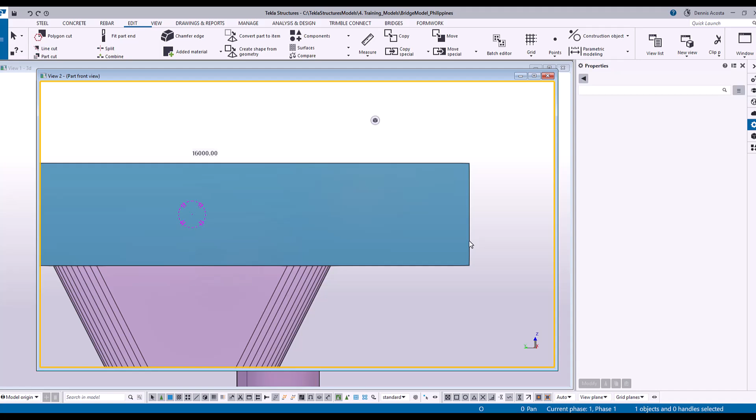Okay, let's see if I can do this using the control key. This will be a different way of cutting without using the construction point.

Polygon cut, select the part to be cut. Okay, and from here this is my reference point. Okay, 1, 500.

Okay, 500, and to get 500 from here I need to pick this again but pressing the control key, and then go for 500 again. And here, to get 4,500, I will press the control key and then 4,500. And then this one, and then middle button of your mouse.

So if you notice, I created the cut without using the construction point. Okay, but of course at first it's a bit hard because you need to know how to use the control key on the keyboard. So if you don't know how to use the control key, then we can go back to the original way.

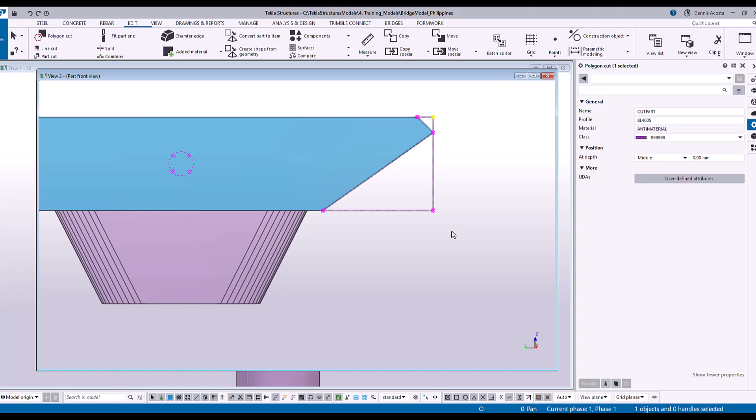So again, points. This one, negative 500, apply. So 500, 500, and then 4,500. Maybe at this point, it's easier to do this because you have points that need to be picked.

Okay, let's go back to the polygon cut. So pick the part to be cut, and then 1, 2, 3, 4.

Oops, I made a wrong click. Press the backspace — when you make a wrong click, you don't need to repeat everything. Just backspace to remove the latest pick point. And then, middle button of your mouse.

There you go. Okay, so again, just copy mirror. Copy, mirror. I think, yes.

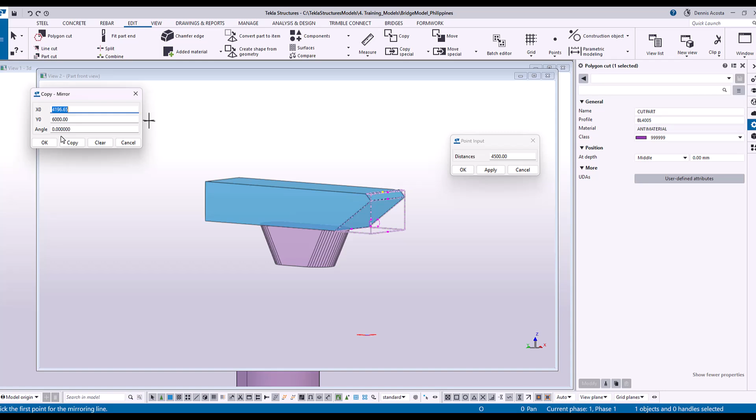Next I'm going to use the side view. This side view here, Control 4. So in the side view, again 500, negative 500, apply. So I'll place points here again.

Using the cut line cut: select, then 1, 2, 3, 4. This means select the part to be cut first, then 1, 2 for the direction, then select which side to remove. That's the line cut. So now we have this.

So, maybe in this shape, instead of a straight cut, we can make it a curve on the side. If we want to curve this cut on the side, we can do that.

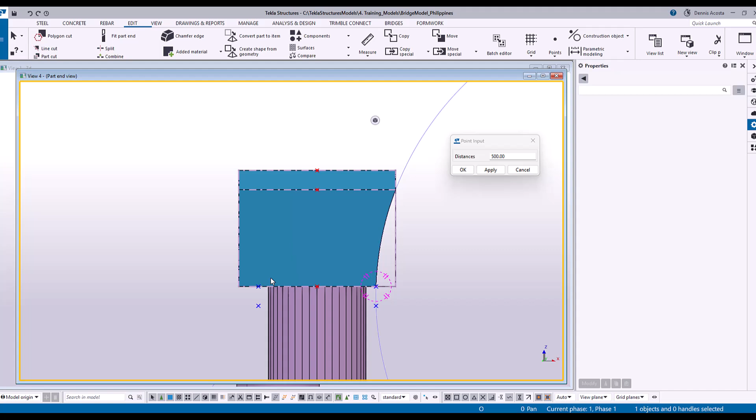Let's just copy this. Copy, mirror. So let's go to the top view. Copy mirror. So let's remove this reference. And then, we now have the cut.

Okay, to repeat, I'm going to repeat this one. It's a straight one. So what I did here was copy these points, moved them 500 so I have 3 points to pick. And then all I have to do is go to this construction object, circle, but I need to choose 3 points by 3 points. So select this part, 1, and then 2, and then the one 500 below.

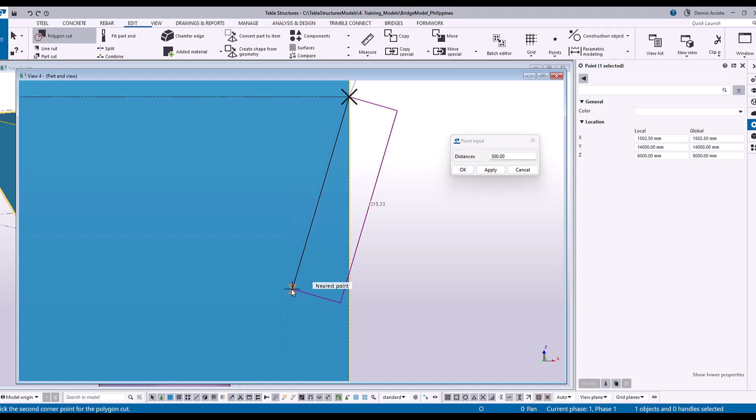So from that construction object, what I will do is use the polygon cut, right? And then select the part, then 1, 2, anywhere on that circle, as long as you pick the part of that circle, 3, 4, and then middle button of your mouse. Then remember, it will have a handle in the middle, select it, and then change it to arc point, and then enter.

And there you go. So now you have the circle, just select this, and then delete. Okay, so just close it. Now, to clean up this view, you can remove the construction points there.

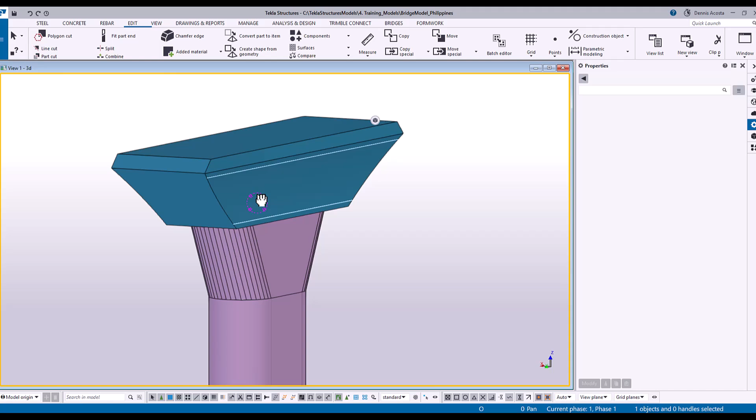So now it has kind of architectural features because, you know, architectural designs usually have a bit of curve. Again, if you're having a hard time adding that curve, you can just simply cut it straight. No worries, but at least you know we can do it as a curve too.

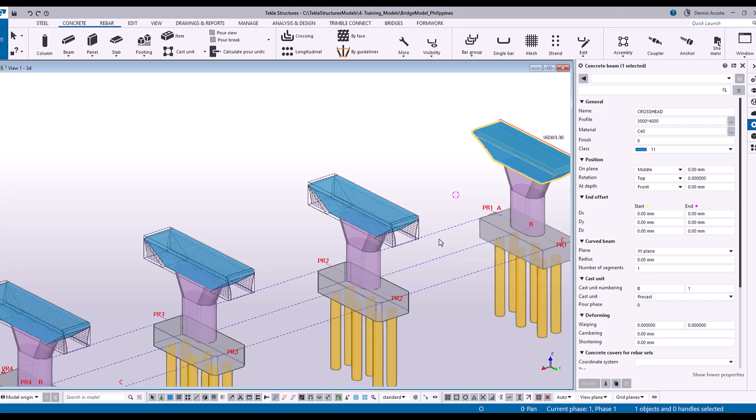Okay, so ang gagawin lang natin dito, simply copy this one, copy, linear, from this point to this point. So 1, 2, 3, three copies. Ayun, meron na tayo. Then i-redraw nyo lang yung view natin kanina, kasi pag once nag-copy dyan, lumalabas uli yung cuts. So redraw para mawala yung cuts. So at the moment, straight lang tayo, linear lang tayo. Tomorrow, kapag meron na tayong alignment, then we can follow the alignment. Okay, so yes, we're done with this.

Crosshead. Okay, halimbawa meron tayong may cuts tayo dito, di ba? So usually kasi ganyan eh, minomodel muna natin, then suddenly, ay meron palang cut. So paano ko uulitin ngayon doon sa tatlong beam na pare-pareho sila? Pero na-i-model ko na. Ayaw mo namang i-delete ko ulit, then copy. Pwede naman yon, i-delete ko lahat yon and then copy.

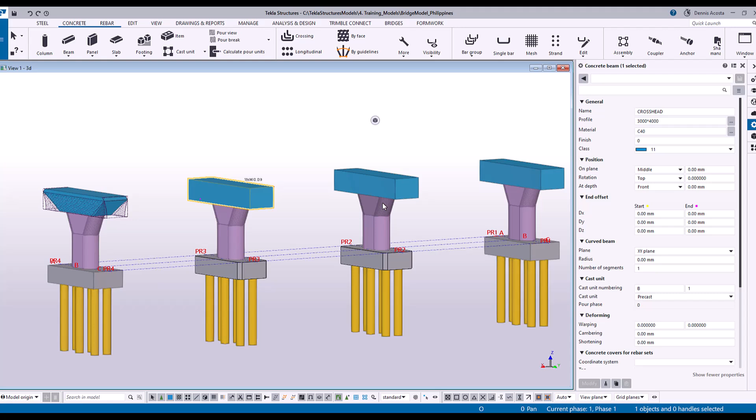Pero kung since nakapag-create ka na ng identical beam, at para i-copy mo yung detail na ginawa mo from one crosshead to another crosshead, all you have to do is this. Nakita nyo itong select assemblies, kindly click select assemblies. Okay, naselect na natin yung assemblies. Then iselect natin itong yung first assembly, yung first object na ginawa natin ng cuts. Then right-click, makikita nyo copy all content to another object. Sa copy special, all content to another object. And then all you have to do is pick the destination object.

So tingnan nyo, 1, 2, 3. So yung option na yan, not only work for cuts, but kung meron kang reinforcement na ginawa dito sa isa, and then you have the identical, you can copy to another object. Or kung meron kang ginawang cut dito, pwedeng copy to, or kung meron kang inilagay na steel embedded part doon sa object na yon, pwedeng copy to another object or copy all content to another object.

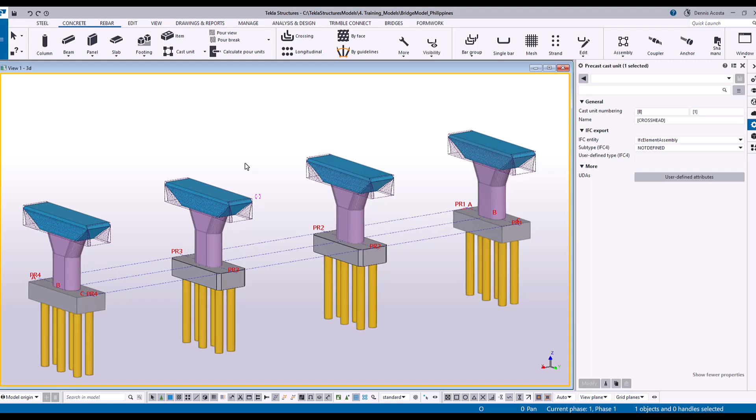And then i-turn off uli natin yung ating cuts and fittings, modify, and then balik uli tayo doon sa select component, ha? Kanina kasi sinelect assemblies natin eh, select components ulit tayo, select components. Sir, for example po, kapag kunyari sa bearing, masasama din po ba yung pag-content? Yes. Okay, let's do the bearing.

Yung bearing, okay, from here, doon sa right-hand side, makikita nyo, meron tayong application and component, di ba? So kindly select this three bar and then import custom component. Kindly import custom component, sige click nyo yan. Okay, ulit, on the right-hand side, mapapansin nyo, meron tayo ditong tatlong icon, apat na box dito sa baba, which is application, component and components. So i-click nyo yan, application and components, and then kapag lumabas natin application and component, lalabas na yung tatlong bars. So from that three bars, kindly select import custom component.

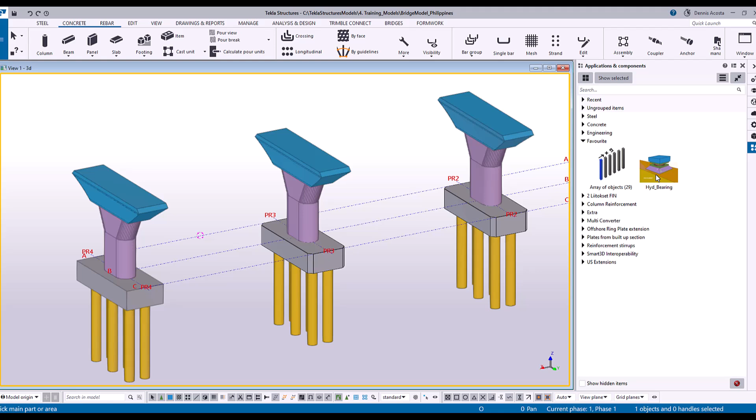Okay, so look, paano natin gagamitin ngayon yung bearing na yan? Okay, so once na-i-close mo yan, mapapansin mo, meron na ngayon ditong favorite, makikita mo na yung HYD bearing. So i-double click nyo yan, kindly double click the bearing. Makikita nyo, meron siyang, yan. Ito na yung, hindi siya fully detailed, pero as a presentation of bearing, it could be like this. And then the thing here is, as you can see here, meron akong ginawang option dito na tawag dito, control depends on the slope. Minsan kasi, di ba, merong yung slope is pa ganito, minsan pantay. So meron tayong ginawang option dito. So later on, pwede mong i-move siya, and then at the same time, yung mga dimension nito, pwede mong laruin kung anong size siya. Okay, so paano ngayon gagamitin ito? Okay, ang paggamit nito is this.

Okay, halimbawa, from this point to this point, hatiin natin siya into 5 spacing. Just for an example ha, pero pwede nyo namang mag-decide kung saan nyo ilalagay yung bearing. Gusto ko lang ipakita sa inyo paano ginagamit, paano i-add yung bearing.

One way, of course, you can model it one by one. But if you model that one by one, lot of procedure. Pero kaya meron tayong component to make our work easier.

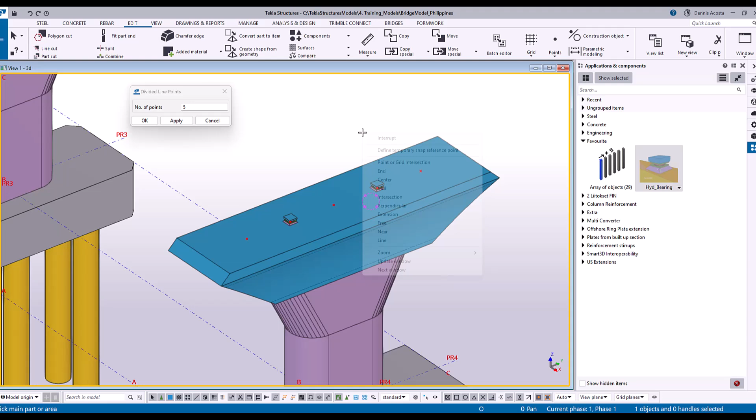Kung nalilitan ka sa bearing, then of course, you can always change this one. Halimbawa, ang bearing mo is 600 by 800 dito. Modify. So select mo lang to and then modify. So it could be a different size.

Okay, gets? Yes. Ngayon, going back to your question. Hindi ko naman nalimutan yung question mo. Okay, so look. Naka-select component tayo, di ba? Select components, kasi itong bearing is a component.

Ngayon, kapag isinelect ko tong component na to, right-click, copy special to another object. Kanina, nung nag-select tayo ng assembly, all content to another object. Ibig sabihin, kung ano yung content ng assembly na yon, ika-copy niya. Ngayon, this time around, nag-select tayo ng component, makikita mo rito to another object. Ibig sabihin, kung ano yung selected item mo, yun lang yung ika-copy mo.

Okay, so two different things ha. Yung isa kanina, all content, kung ano yung part ng assembly. Ngayon, this time, kung ano lang yung sinelect mo. Halimbawa, sinelect ko itong dalawang assembly na to, or component na to, to another object. Okay, i-pick mo yung source, and then yung destination. Clear?

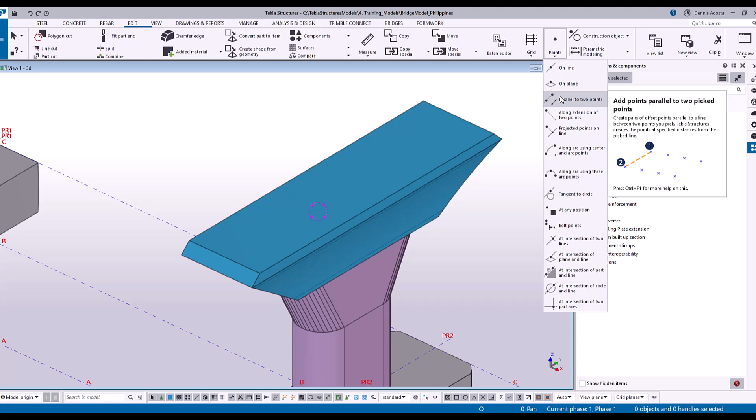Ulitin ko. Gagawa ako rito ng online, from this point to this point. And then what I will do is, I'm going to move this one 1,000 from here. And then copy these 2 points. Copy. And this one is 2,000 from here. Bakit? Kasi copy, copy, 2,000 from here. Why? So that here, I can just simply pick 1, 2.

Hindi siya nag-move. Okay, anyway, hindi pala siya nag-move kasi nasa center siya. So hindi ko siya nalagyan ng... anyway, should be okay. Ang gagawin lang natin dito is i-explode lang natin siya. Explode. And then once na-explode mo na siya, pwede mo na siyang i-move.

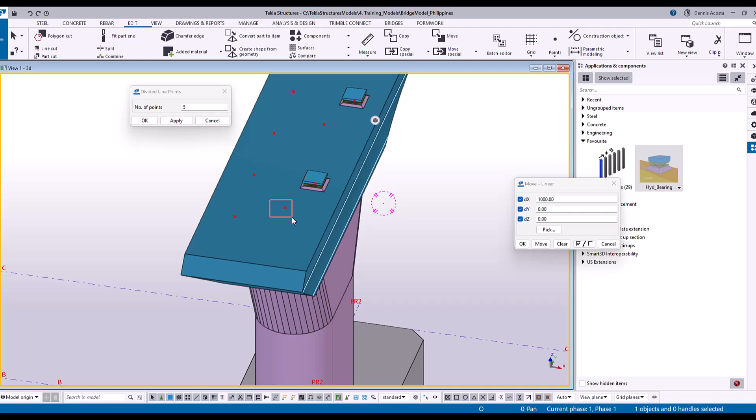Move special linear. So from this point to this point, 1,000. Parang ganyan, akala ko nakabind po siya sa center. Nakabind siya sa center, inilagay ko kasi siya, nabind ko siya sa center. Hindi sa dito sa side.

So ang gagawin lang natin diyan is i-move ko siya diyan, okay, center. And then dito, maglalagay ako ngayon dito ng panibago, which is again, points online. And then move 1 meter, copy 2 meters.

So ito yung ating... so bakit naglagay ako dito sa side? Kasi ang bala ko dyan, maglalagay ako dyan ng bridge girder. Yung isa bridge deck, yung isa bridge girder. So combination. Okay, so ngayon paano natin ika-copy yan? So copy na lang siya. Copy, hindi copy special ha. Bakit copy? Kasi kapag copy, ibig sabihin, pwede mo siyang parang copy multiple. See?

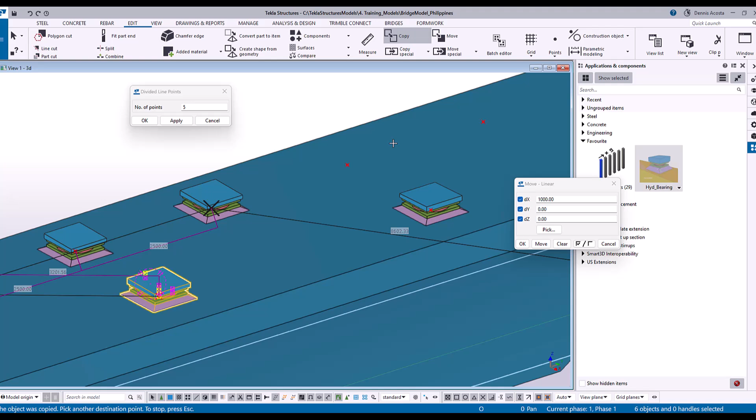Alright, and then here as well. 1, 2, 3, 4, 5. There you go. Or ito, copy na rin natin lahat yan from this point to this point. Okay, alright, so don't forget to save.

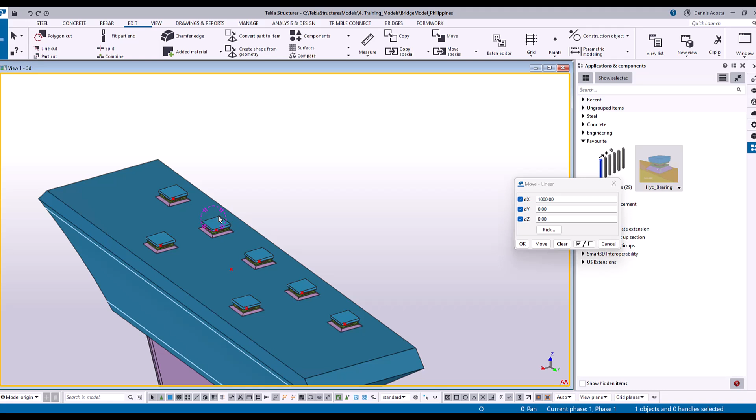Okay, nakita nyo yung itong mga points na to na ginawa natin. Itong mga points na to. Ang gagawin ko dyan, isi-select ko siya like this. Okay, select like this one. Shift key para ma-select natin. Kaya ako naman siya isinelect ng ganito is to move.

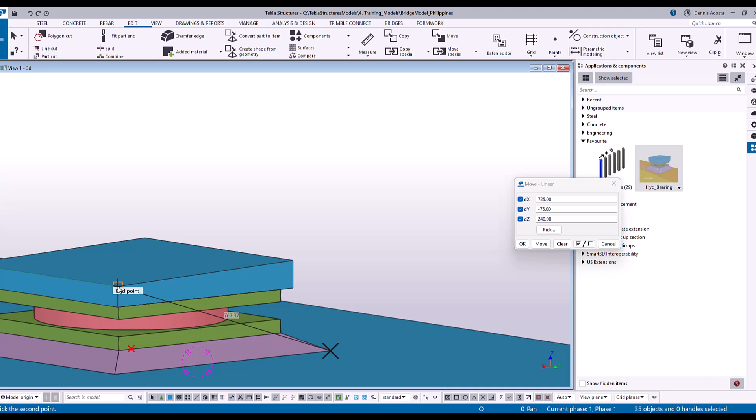Okay, to move. Right click and then move linear. So from this point to this point, from move linear, from this point to this point, going up is 240. Gawin lang natin tong 0, and then move, para nandoon siya sa top.

Wala, pag ni-redraw nyo, mawawala siya, di ba? Palitan nyo lang yung visibility up.

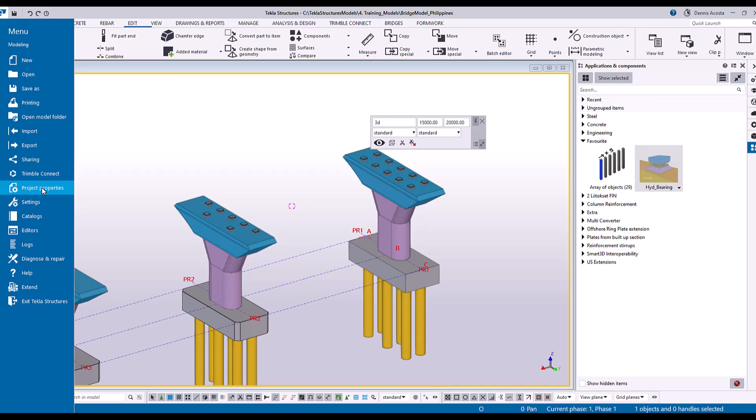Pasuyo naman, kindly go to your catalog and then select the profile catalog. Yung ginawa natin kanina, di ba? Yung profile catalog. Mag-import tayo ng profile for our bridge girder there. Okay? So, I want you to go back to the profile catalog.

Okay, so ngayon, the reason na pina-import ko sa inyo yung profile kasi meron akong ginawa dyan na box girder. Box girder, okay? So from here, punta ulit tayo sa kanina, di ba, nag-import tayo ng bearing? So, same thing.

I want you to import custom component, but this time, i-click nyo yung box girder. Bridge girder yata yun. Bridge girder. Saglit, ha?

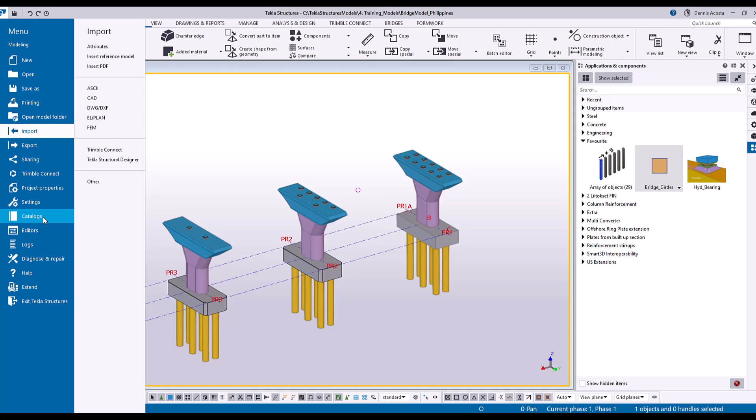So, import. Tawag dito, it's something like from Dennis. Hindi ito. UEL siya. Bridge girder. No. Sorry, parang may mali. Dapat yata is LIS pala yung inimport nyo. LIS merge.

Okay. Ulit tayo doon sa profile catalog. Medyo na-confuse ako dito kasi dalawa siya. Yung bridge girder na UEL, that's a custom component. Then doon sa catalog, ang kailangan i-import is LIS. Import LIS. Okay, and then save the model folder. Ang lalabas sa inyo, kapag tama yung ginawa natin, ito yung bridge girder natin. Here.

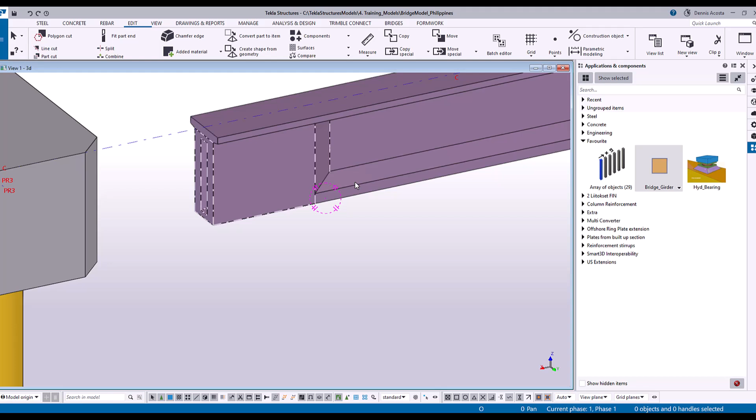So this one is a combination of profile. At the same time, naglagay ako ng block sa two ends. Usually ganito yung mga bridge girder, pero it could be any shape. So ngayon, select natin yung bridge girder, and then pick 1, 2. Makikita natin, nasa ilalim. Double click, and then yung position, gawin natin siyang front 0.

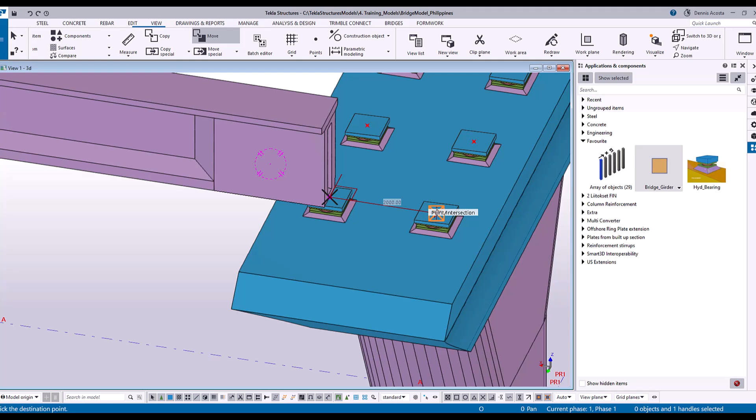But, ang problema dito is, yung aking custom component, hindi ako nagkaroon ng parameter to extend. So, we need to extend this one manually. You can just simply move this one here. Kung 2,000 yan, magkano yung gap? Kung 100, move ng 950. Oops, may mali. Undo. Ganito na lang gawin natin.

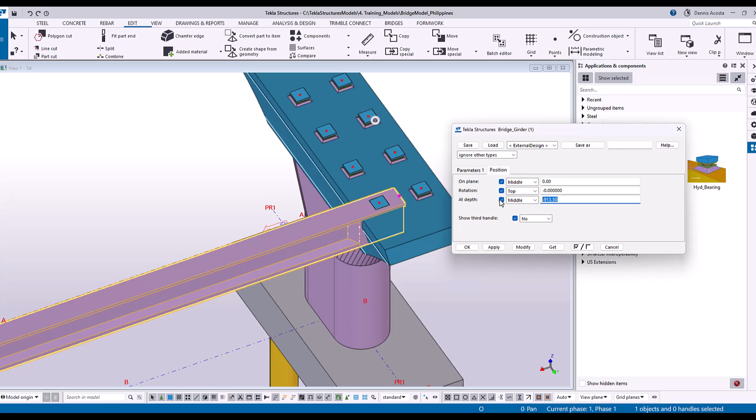Since hindi siya ma-move, mag-offset na lang tayo ng points. Offset tayo ng points, let's say 950. Apply, and okay. Pick mo yung point dito, offset, and then pick mo yung point dito, offset. So with that, ito na yung i-click ko. Double click, and then position, 0, front, modify.

Kung gusto mong magkaroon pa rin siya ng gap, pwede kang maglagay dito ng 10 mm, modify. So magkakaroon siya ng gap. Depends, okay? Or 0 lang muna.

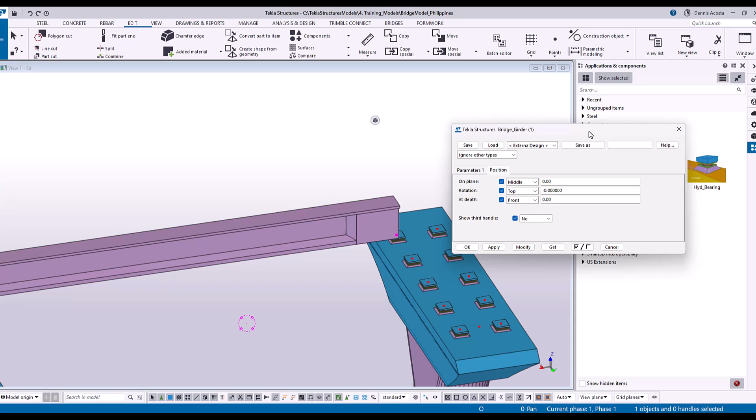Sa direct modification po pwede. So select mo lang tong point na to. And then, move mo siya rito. Type mo is 950. Yan, pwede siya sa direct modification.

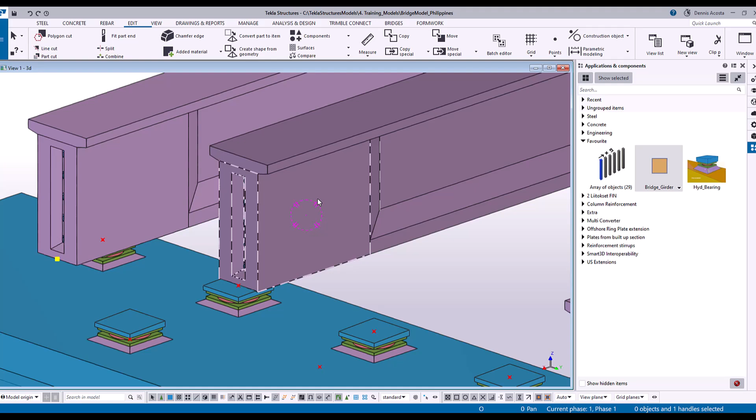Ulitin natin ha. Kung sakali na ipinik mo tong point na to and then you want to offset na 950, you need to turn on the direct modification. So direct modification, then isi-select mo lang yung handle na to and then move. I-move mo siya rito. Make it straight and then you type 950. And then the other one, ganon din. Move 950.

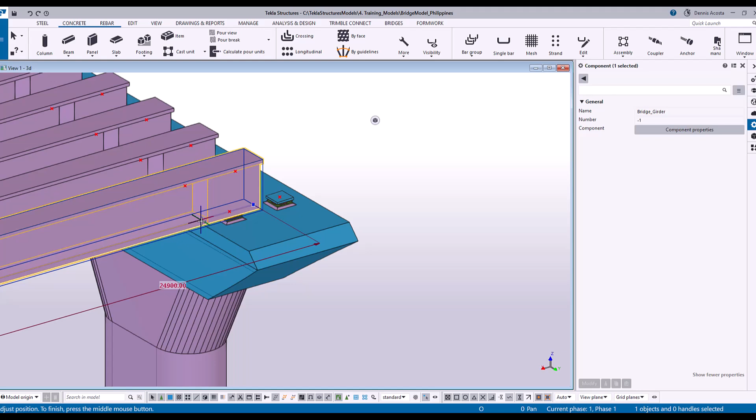Sa direct modification, halimbawa dito, nag-click tayo ng direct modification dito. Select mo yung direct modification. Halimbawa, ulit, select mo to. Pag sinelect mo siya as direct modification, ganyan ang original. Pag i-move mo yung cursor mo, somewhere here, makikita mo yung total length. Pag nakita mo yung total length, puntahan mo lang yung arrow. Itong arrow na to. Click mo yung arrow.

Arrow going forward is positive. Pag negative, lagyan mo lang ng negative. Halimbawa, gawin ko tong negative 950, babalik siya doon sa original form. Pero pag tinype ko is 950, so mas madali, hindi mo na siya i-stretch. Select mo lang yung arrow para doon sa direction na pupuntahan mo.

Okay, so ang next natin is we're going to bring up the bridge deck. Kinopya nyo yung AutoCAD profile. So in Tekla Structures, kapag meron na kayong AutoCAD profile as a shape, no need for you to reinvent or create. Pero this one will be a fixed profile. Fixed profile means you cannot change the width, you cannot change the height. Unlike doon sa kanina na ginawa natin na parametric cross-section, you can change the width and height. Pero pag ito ay galing sa AutoCAD with a shape, it will be fixed. So that's the difference.

So ngayon, paano natin kukuhanin yung profile na yon dito sa model natin? Punta tayo dito sa right-hand side and then you type here DWG. Punta tayo sa components and catalog or application and components. Then you type DWG. So under this, double-click the DWG profile to library. And then, select parameters. And then, i-type nyo yung input file. And then look for the box girder DWG. And then hit OK.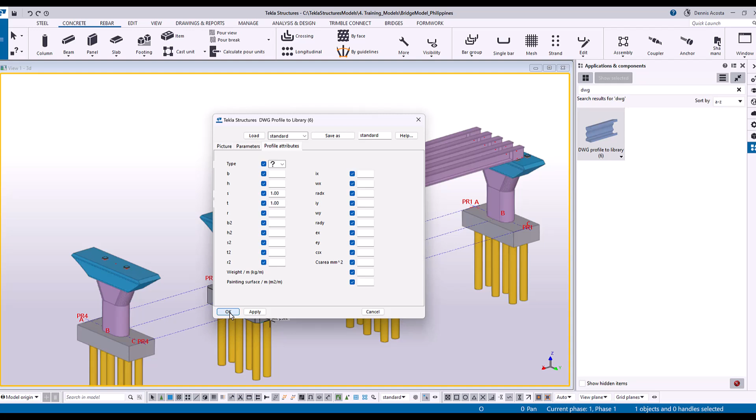Punta tayo dito sa profile attributes. Mapapansin nyo, meron ditong type. You select question mark. Apply, and okay. So, once you apply and okay, nailagay na natin yung proper naming, all you have to do is to pick 2 points. Parang beam lang to. Papasok kasi siya sa beam profile. So look, pag nag-pick tayo ng 1, 2, eto na yung profile natin.

So any shape of the profile, if you have the AutoCAD, you can bring in inside Tekla Structure. And then the good thing is this one, if you inquire part, there will be a calculated volume of the concrete. Imagine volume of the concrete. Kung gagawin nyo yan sa, may AutoCAD nga kayo, different, so creation pa lang ng volume ng concrete nito, I think it takes time.

With the weight. Okay? Now, if you double click on this one, eto na yung profile name natin, BG 1,000 or kung ano man ang profile name na gusto nyo ilagay dyan. So this time around, you can now apply that one on the top of the bridge or of the crosshead. Okay? So I'll leave it to you now as your exercise.

But before that, we can have a coffee break. Okay?

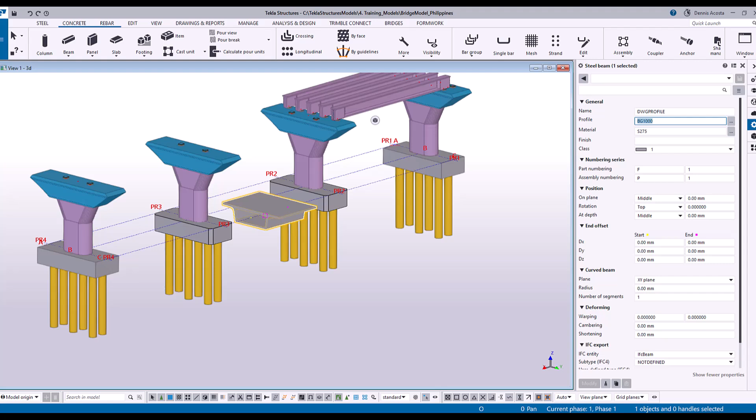So for the box girder, type lang natin dito is box girder or maybe lagay lang natin na bridge deck. Bridge deck. Okay? And then yung profile, hanapin natin dito yung BG star. So kung mapapansin nyo, nilalagay ko lang hindi yung full name, BG and then star. Parang nagse-search tayo. Star key is parang filtering anything. So BG 1000, apply and okay.

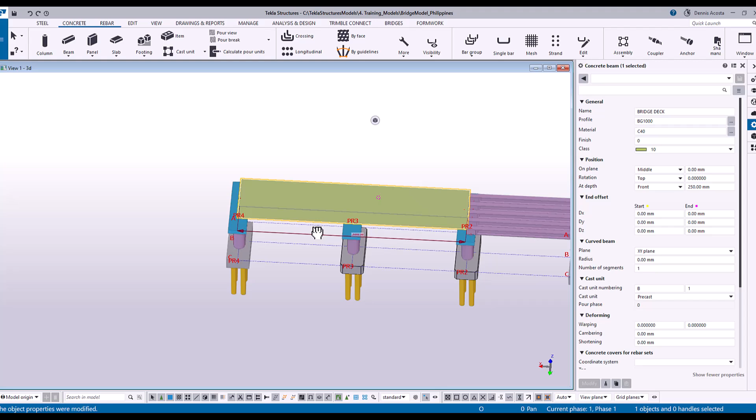So dito, gagawin ko is let's say color green or whatever color. Front, okay? So pick this one. Pick this point. And then pick this point and there you go. So now, meron ako dito, oops, kulang. And then I have to move this one front, let's say 250, modify, there you go. Okay? And then, ito, pwede ko pa siyang i-extend ng, sabihin nating 5,000.

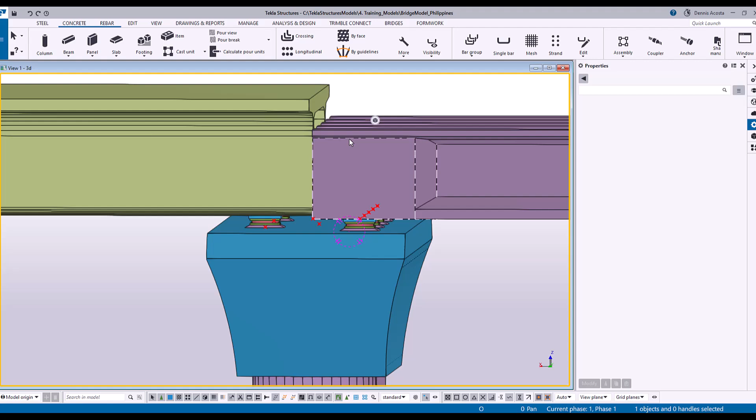Okay? Or else, pag sinunod natin to with the slab, magiging masyadong makapal naman yung slab natin. Okay? So, it's better to put that one on the crosshead. Pero, it's just an example. Now, in this case, kung sakali na itong bridge deck natin is segmented bridge deck, okay? The good thing is, we can just easily split.

So, select this one. So, usually, ilan bang split niya? Halimbawa, itong sa crosshead is maybe 9 meters. Then, next is, let's say, 4 meters. Next is 4 meters. 4 meters. So, you can easily split. Okay, dito is 9 meters ulit. And then, here, 4 meters. So, even if you do that one manually, madali pa rin. And there you go. So, segmented bridge deck na siya.

And this is something like the basic one. So hopefully at the end of this day, you have this. And then i-export ko ngayon to later, lalagay natin sa HoloLens para makita natin yung ginawa natin. Okay?

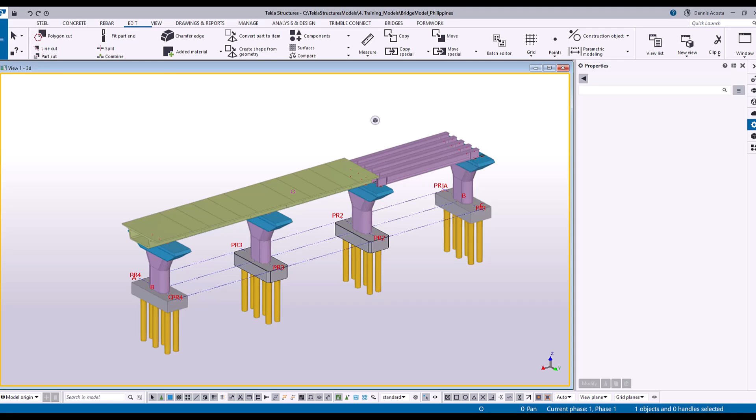For rebar, let's start with the foundation. Okay, for the foundation, meron tayong tinatawag dito na pile cap. This pile cap. I don't know if this one works, pero let's try. So, if I apply this one, wala akong gagalawin dito. I will just use the default, and then later we can change, ha? So, i-type mo lang yung pile cap, and then once you apply, pick the object. I'm going to select this object. Sinelect ko lang yung foundation.

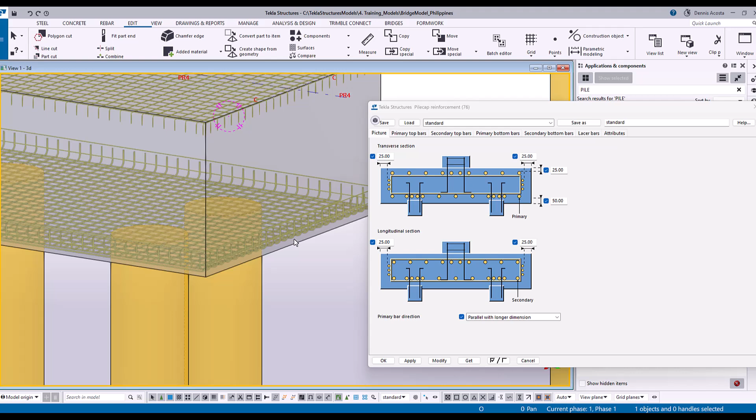Okay. So, meron siyang reinforcement top and bottom. Ngayon, for the adjustment, kung mapapansin nyo, kailangan nating i-extend yung bend sa bottom. Halimbawa, primary bottom bars. Kung mapapansin nyo rito, we use T20. And then this one is a straight one. And then bend length left. Kung ito is 2.5, then I'll put here 1.5 and then here 1.5 and then modify. Look what will happen. Na-extend, di ba? Extended siya. Both ends. Ngayon, that is the primary bar.

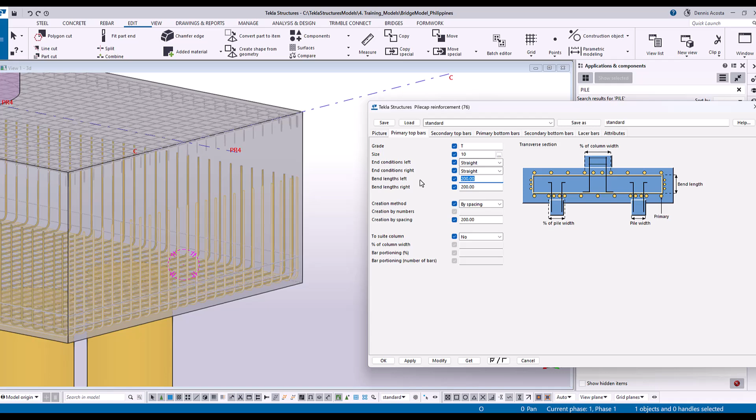How about the secondary bar? So, gawin din natin dito, 1.5 and then 1.5. Modify. And there you go. So, ngayon, yung primary top bar, we'll just put another 1.5 as well, and dito is 1.5. So, magkakaroon siya ng overlapping. So, later, we'll change the overlap. So, palitan muna natin to ng 20 dia bar uli. 20 dia bar. And then, the secondary top bar, palitan din natin ng 20 dia bar, and then 1.5, 1.5. So, kaya ko ginawang 1.5, 1.5, magkakaroon siya ng splice na 1 meter.

Ngayon, depende kung gaano kalaki yung i-splice nyo. So, i-extend nyo na lang yung size. Depende sa design. Okay? So, ang tanong dito, paano kaya ito? May collision, diba? Actually, yung collision dito, it should be okay kasi sa layout naman nila sa site, they can move it left or right. Pero, in this case, kung gusto natin na magkaroon ng positioning ng ating top bar and bottom bar.

So let's try under the picture, on top bar, tingnan natin spacing, hindi, makikita natin yung start end nito. So halimbawa ito, instead na 25, I'll put it 50, modify.

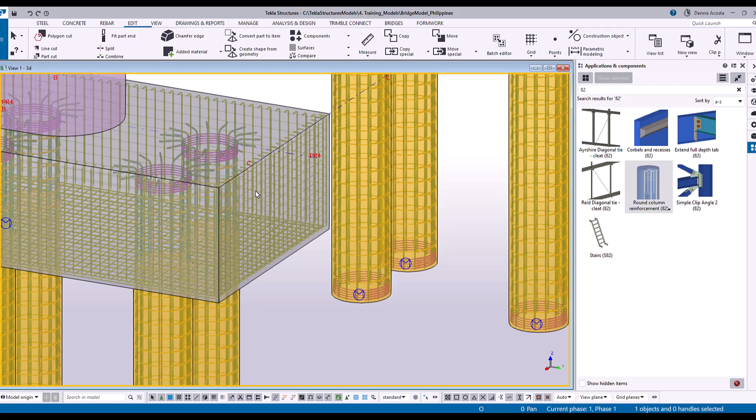And then, redraw. So, lalabas ngayon yung reinforcement dito. Ang tanong, doon ba sa footing natin, pad footing, pag ginamit natin siya sa slab, anong kalalabasan? Illegal output. Hindi siya gagana.

Pero, is there any component that we can use? Pwede siguro gamitan natin ng itong mesh bar. Ang pangalan lang niya is mesh bar, pero it's a bar group as well. See?

Mesh bar, pero bar group pa rin. Okay? Or else, kung talagang ang gusto natin ay ito kasi kapag ikinat natin, I think tingnan ko kung magre-react, kung lalagyan ko ng line cut. Alam ko hindi magre-react to. Yan, walang reaction. Wala siyang reaction. So it's not meant for that particular.

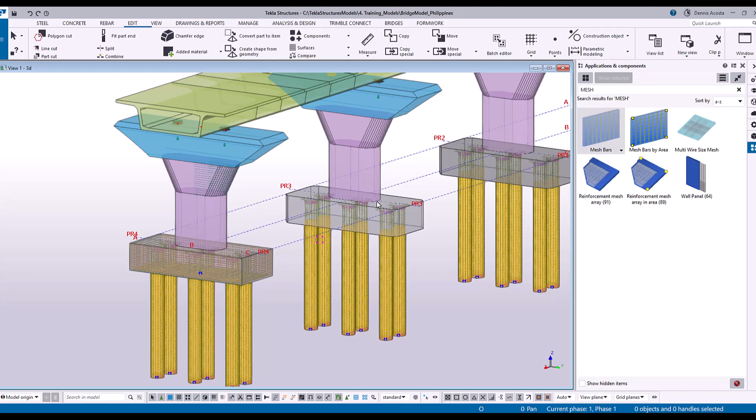So pinaka the best pa rin is using this mesh bar. Kasi yung mesh bar automatic susunod siya doon. Kahit lagyan mo siya ng bend dito, bend and condition. So ito.

Okay? And then modify. See? Susunod siya. Okay? So that's the difference. So different component.

Okay, so far, any question? Meron na tayong reinforcement sa foundation. May reinforcement na tayo sa pile. Especially, okay, if you're managing the project, at least, from your side, alam mo na kung ano yung nangyayari sa project mo. Alam mo kung ganong karaming reinforcement ang kakailanganin. You can easily calculate the number of reinforcement here.

Bakit? Kasi, sa number of reinforcement here, kapag nira natin yung numbering, okay, look ha. Let me just show you something about the report for the reinforcement. Okay. Copy. Okay, look at this ha.

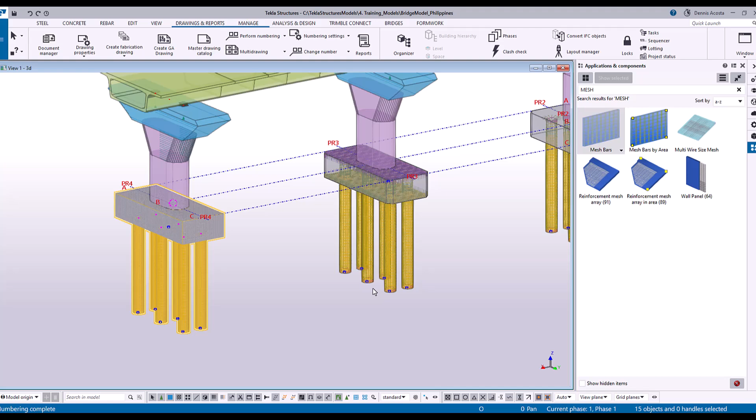Okay, I mean, the answer of course comes from you ha. So in my case, to give you the details of that bar bending schedule, in PDF format, in Excel format, or by the way, I have the PDF format.

So, select ko lang to and then create from selected. Sabihin na natin, iselect ko na lahat yan. Hindi, pare-pareho naman siya. So, it's a multiply lang siya. Pare-pareho naman siya. Okay, all I have to do is to create selected.

So, I think kung ipakita ko sa ito in one day, that's, kumbaga, it's amazing time na yon for kung may gawa ko to ng one day, di ba? Pero dito, create from selected, less than a minute, less than 10 seconds. Ito na yung bar bending schedule mo.

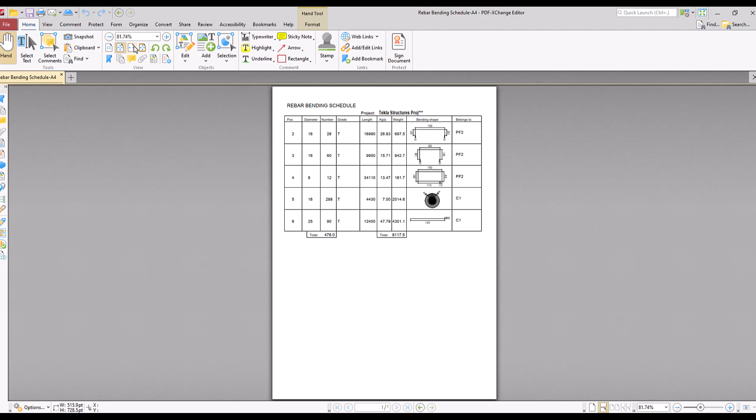Pare-pareho siya, kaya ganyan. Pero, of course, imagine mo. Kasi, standard naman siya. Pero ito, hindi siya isang linggo kung gantong ka-standard. Pero syempre, kung yung different shape, pero nakita mo naman yung difference niya. Less than 5 seconds, ito na yung report niya kasi halos pare-pareho naman siya. So, ito na yung bar bending schedule, yung kung saan siya nakabilang sa C1, sa C1.

So later on, pag nag-create pa tayo ng rate, okay, I think, tingnan natin kung gagana yung rebar dito. Okay, gumagana rin. Okay. Pero, this one is something like, hindi ko siya na-set ng individual rebar. Kasi tapered. Kapag tapered, kailangan mo, individual rebar yan eh. Kaya lang dito, is naka-set up siya as a group na meron siyang variation.

Kasi pag halimbawa, mga tapered beam, di ba? Meron kasing reporting sa reinforcement na kapag tapered beam, ang reporting nila sa bar bending schedule is, let's say, from 500 to 200. Okay? 500 to 200. Hindi nila i-details ng single bar. Wherein in Tekla structure, you can create a single bar detail.

Ibig sabihin, okay, tingnan natin yung ibang report. Halimbawa is report, rebar bending list, single bar. Ito, single bar list. Create from selected.

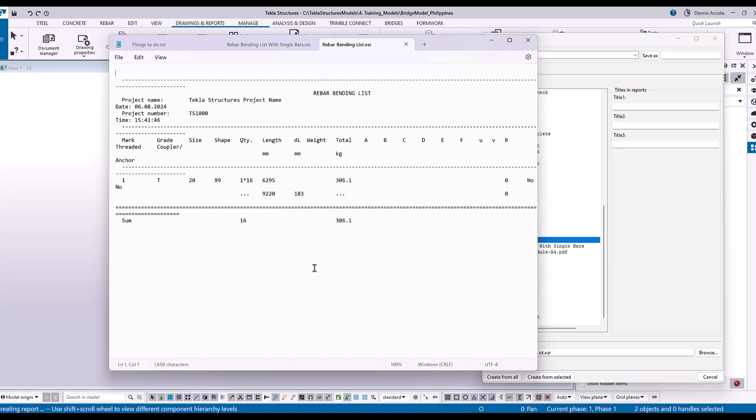Okay, now, the question is, what if your shape is this one? Kasi dito sa itong shape na to, I'll be frank to you, wala tayong component dito.

Show only selected. Press shift and then show only selected. Ibig sabihin, kapag malaki yung file nyo, gusto mong mag-isolate ng isang part lang para i-reinforce, show only selected. Kapag nag-click kayo ng show only selected without pressing the shift key, tingnan nyo kung ano mangyayari. Merong ghost image, di ba?

Ngayon, i-select nyo ulit siya, and then right-click, show only selected but press shift key. Shift. There you go, direct notification. Yun yung difference ha. Ganoon din sa hide. Kapag nag-hide ka without pressing the shift key, meron siyang mga line, pero with pressing the shift key, everything will be hidden, the selected part.

Okay, dito talagang hindi ako sure about the reinforcement. Halimbawa, kung maglagay ako ng rectangular column, click, look what will happen. Charan! So, hindi siya nako-consider. It considered the boundary for the rectangular.

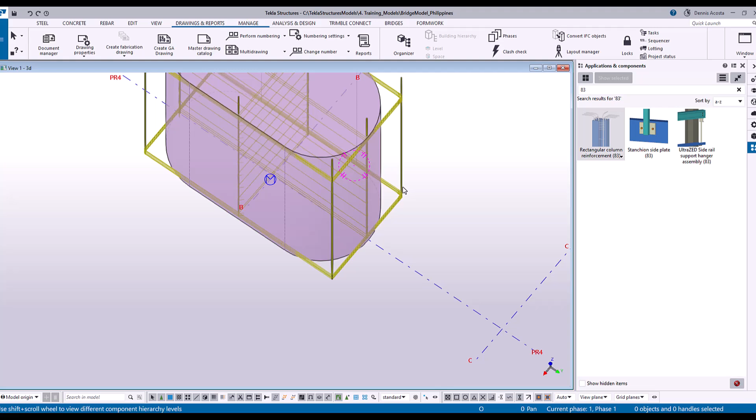Ngayon, pag ginamitan ko naman siya ng 82, hindi siya nababasa, di ba? Ano ang gagamitin ngayon natin?

Manual. So kung manual, paano ngayon natin gagawin ang manual nito? Kasi sa manual nito, dalawa kasi yung bar natin. Halimbawa, kung bar group, pag dinouble click natin yung bar group, okay, look, 1, and then 2, 3, 4, 5, 6, middle button of your mouse, and then from this point to this point. Sorry.

This one should be normal. Okay, again, 1, 2, okay, ito yung shape natin. So, ibig sabihin, 1, 2, 3, okay, look.

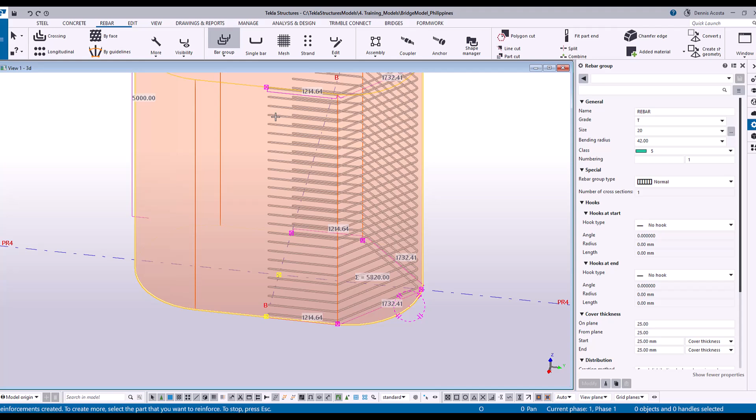Pero, this one, i-check lang natin kung gagana ha. Meron tayong tinatawag dito na radius, itong bending radius. So dito is 42. And then space, medyo kung 2,000, space 42. Hindi siya gagana. 1,000, ayun, no? Parang ganito. So hindi talaga siya, mahirap siyang gamitin.

Okay, but let's try the other reinforcement. From the rebar, you will find this one, you will find the rebar set. Makikita nyo rito yung crossing, and then longitudinal.

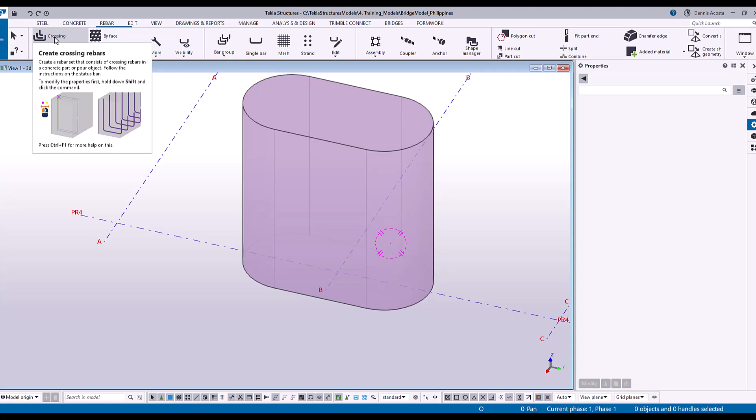Okay, let's say select the crossing. Kapag sinelect natin tong crossing, pwede nating palitan yung size niya ng let's say 16 mm edge. Okay, look, crossing, 16 mm edge, and then the target spacing is 200. So, tingnan nyo ha, look at my cursor.

Wala pong lumalabas, ha? Wala pong lumalabas. Sa inyo, walang lumalabas? Sa iba? Ulit. Crossing, i-move ko lang yung cursor ko doon sa shape. And then click, ano mangyayari? Click, and then middle button of your mouse.

Splitter. Kita niyo yung splitter? Ayun, nag-split siya. Ayun yung splicing niya. Then doon sa splicing, pag i-click nyo yung guidelines sa splicing, pwede mo siyang standard lapping or custom lapping. So, halimbawa, lap length, 1 meter. Modify. Ayun, no? May splice na siya doon.

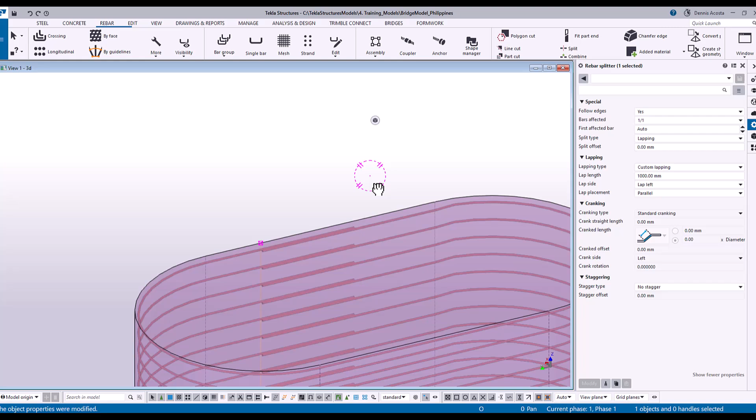And then, lagyan pa natin siya ng splice dito sa kabila. Select muli siya. Splitter. Dito. See? So, dalawa na yung splice niya, sa left and right. Okay? Nakuha nyo? Splitter. Make it sure, sa rebar set kasi, kailangan, very important na you select the direct modification.

Ngayon, the question is, how about the vertical bar? Okay, the vertical bar. So this time, you use the longitudinal. So ito, and then this one, yung dalawang side na yon.

Middle button of your mouse, palitan natin ng kulay. Longitudinal, gawin natin to na, let's say, 25. And then, blue. Okay? So, look, i-select mo uli yung shape na yan. Pag na-select mo na siya, makikita mo yung red, magenta and yellow, yun yung range kung saan niya ilalagay yung vertical. So, kapag ipinik mo to, 1, and then ito, shift to middle button of your mouse, yun, meron na tayong vertical bar doon.

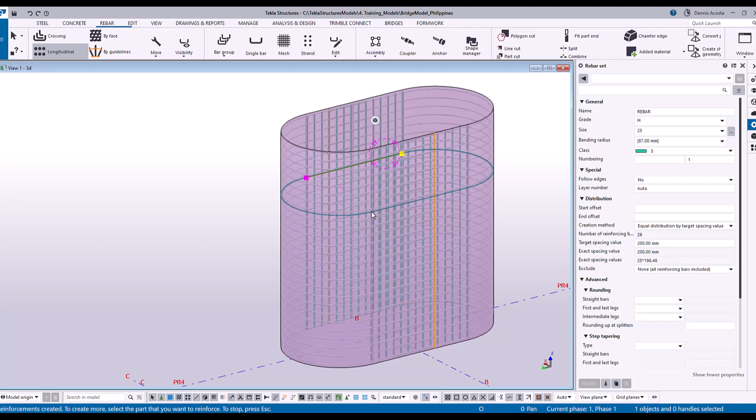How about doon sa round? Okay, sa round, you have to click. I think you have to click something like this. Tingnan natin kung gagana. Nope, it doesn't work that way. Pero sa round, madali na yon.

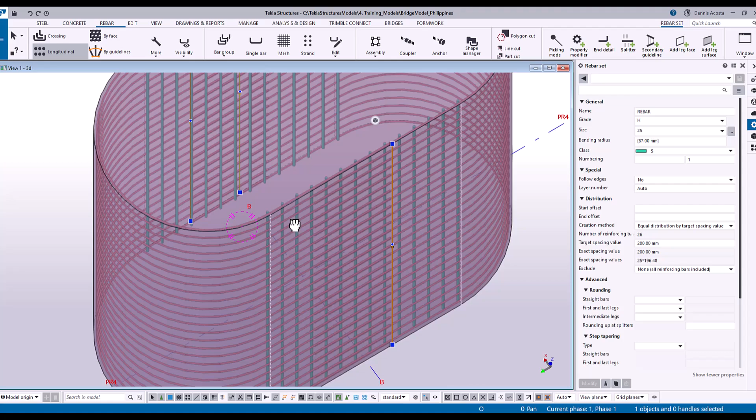Subukan natin uli. Crossing. Nope. Alam ko sa longitudinal dapat gagana rin siya. Okay, something wrong with that. Anyway, sa longitudinal, let me think of other solution for that curve. Pero for sure, pwede yan.

So sa ngayon, ang mangyayari dito is yung itong ating vertical, kailangan nating i-extend, di ba? Kaya kailangan nating i-extend. So, end detail, sa end detail, kung mapapansin nyo rito, yung end detail, ito end detail, end type, hook, straight, pero ang kailangan natin is length, adjustment, leg length. So halimbawa, 1.5, enter, no. Negative.

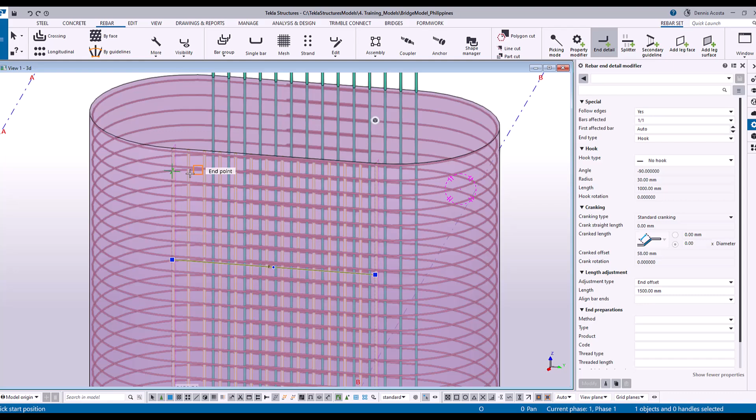Ibang way ito, this one, you have a different way of adding the reinforcement using the bar group. At saka kagandahan nito, kung mapapansin nyo, no? This one, no? Automatically, nag-a-adjust siya doon sa position ng rebar. Hindi siya nagtatouch each other. Kasi meron tong option, tingnan nyo ha.

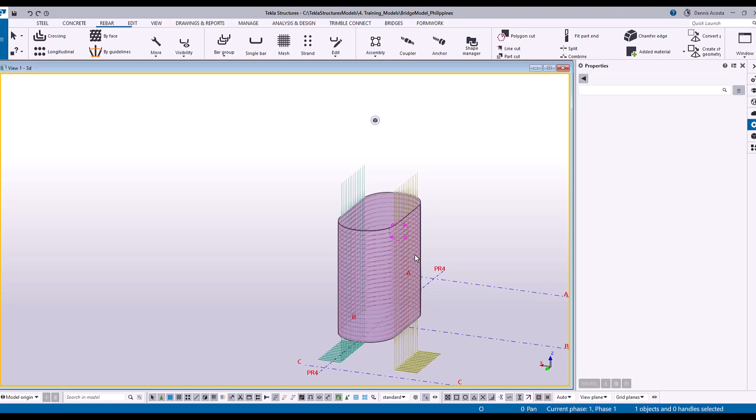Halimbawa, itong rebar na to, sinelect mo tong contextual toolbar, nakalagay dito, move to the outermost layer or move to the innermost layer. Kapag sinabi ko na move to the outermost layer, look what will happen. Nagpalit siya ng positioning. Kapag sinabi ko na move, select, move to the innermost layer, ayun, palit uli siya ng positioning. So this is the, what do you call that? This is the rebar set of Tekla structure. And then, if you redraw, ayan. Ayan na yung position natin.

So, just to give you the concept of adding the reinforcement here. So, we have a different ways to add the reinforcement. Not mentioning, you can create your own reinforcement using the custom component.

Actually, sa bridge deck, pwede rin siya. Ayan. See? Look at the bridge deck. Pwede rin siya. Ang hindi lang siya po pwede dito. Ito dito. Medyo...

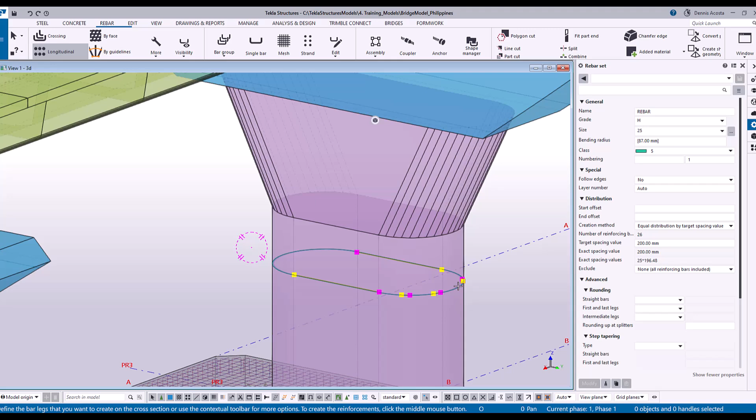Ba't kaya hindi siya pwede rito? Ano ko, meron akong... okay. Let's try this one, ha? Let's see. Show only selected. Kasi gusto kong ma-reinforce tong ano eh. Gusto kong ma-reinforce tong itong gilid na to eh. Using the bar group. Kung mapapansin nyo rito, sa bar group, meron tayong tinatawag na alam ko merong arc eh. Hindi. Curve. Curve to eh.

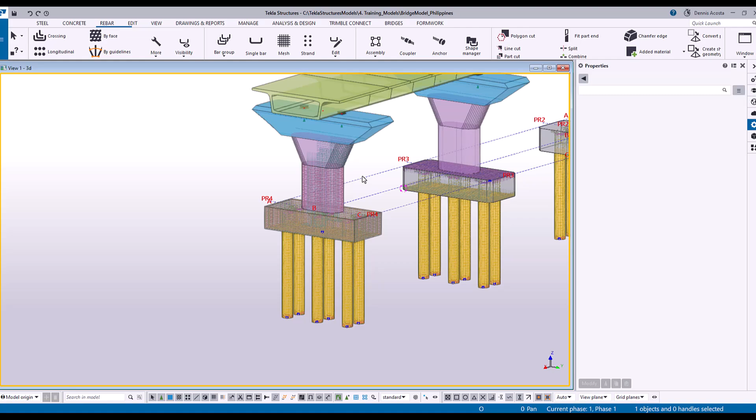Teka, subukan natin to. Tapered curve. So, 1. Pick the shape. 1. The tapered curve din to eh. Sige, anyway, let me check. I think there's a component for that eh. Okay, so far, ito yung ating reinforcement. And again, you can easily get the bar bending schedule there.

Okay, so ito, ano ba to? Show only selected. So let's see, can we add the reinforcement in this shape? Crossing. Look, so 1, 2, crossing. And then 1, sorry. I think hindi na naman gana to. Okay, 2. Tingnan natin dito. Okay. Ayun. Gumana siya sa ganitong shape.

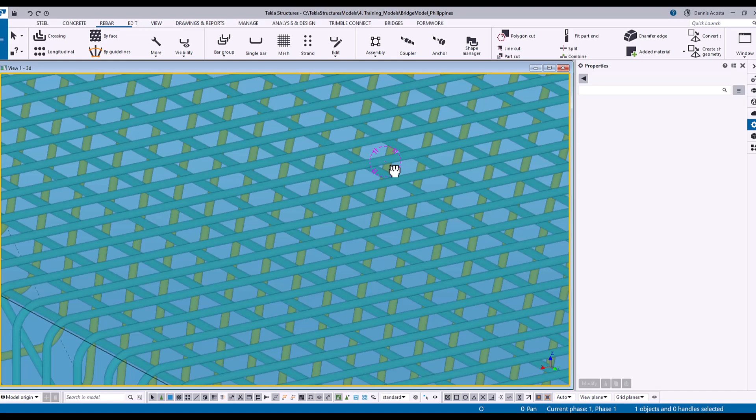And then longitudinal bar. So meron ka ng reinforcement dyan. So again, it's a matter of, the tools are there. So it's a matter of, the user, the detailer, to lay it out. Okay?

Sorry, draw. Ano po yung pinit sa longitudinal? Ano po yung pinit ng points po? Dito, you mean dito? Opo, sir. Show only selected. Okay. So dito, longitudinal, ayun yung shape, di ba? Sorry. Shape. So itong taas, itong baba.

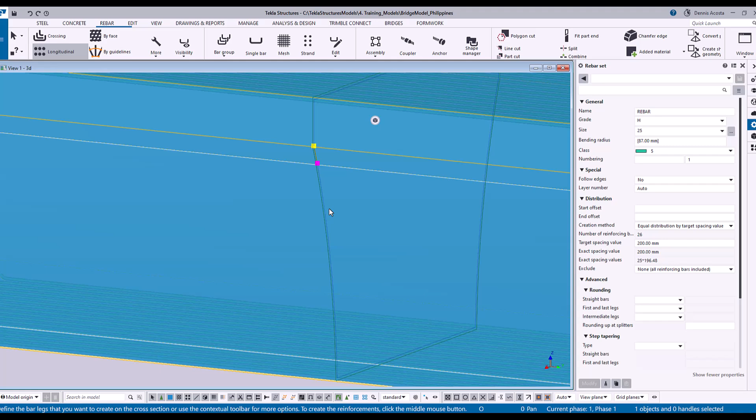Palagay ko dito sa curve, hindi ulitin natin ha, yung, yun, see? Umano pala siya. Okay po, sir. Nag-bend pa rin pala siya doon sa cut, which is good. The rebar set is improving a lot actually. Lumabas po, sir. And then this one. Ayun, dito gumana siya, oh. Tama, gumana yung longitudinal bar dito, oh.

Doon sa column, hindi eh. Pipik lang po yung sa gilid, sir. Yeah. Sa column, gusto ko talaga mapagana yung sa column sa side eh. Alright. Ayun, gumana na. Sabi ko sa inyo, meron yan eh. Nakuha, nagets nyo? Hindi.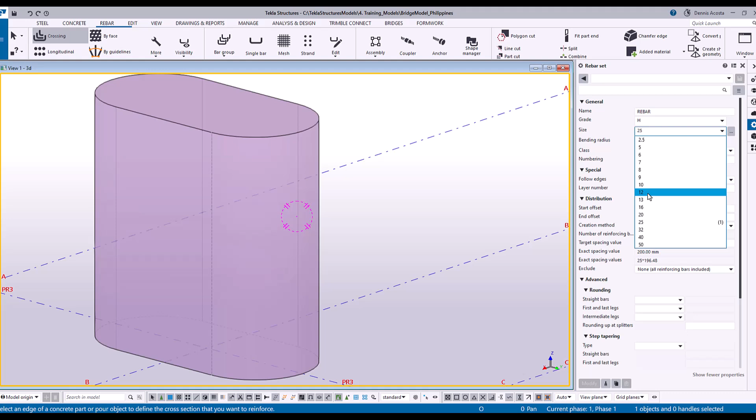Okay. Dito kanina, okay, ulitin natin ha. Kanina, sabi ko sa inyo, gusto ko mapagana yan eh. Okay, look. So, kung lalagyan ko siya ng crossing dito, crossing ha, yung crossing natin, let's say gawin natin na 12. Okay, crossing. Middle button of your mouse. Ayun yung crossing natin, di ba? Ngayon, yung longitudinal bar, gagamitin ko pa rin yung crossing. Hindi yung longitudinal. Sa longitudinal kasi ayaw gumana. So gagamitin ko yung crossing. Halimbawa, palitan natin to ng 25 and then make it red.

Okay, look. See? Or dito. Middle button. Oh, sorry, undo. Dito siguro. Ayun, oh. Okay. There you go. Okay, so I think this is good, and let's stop.